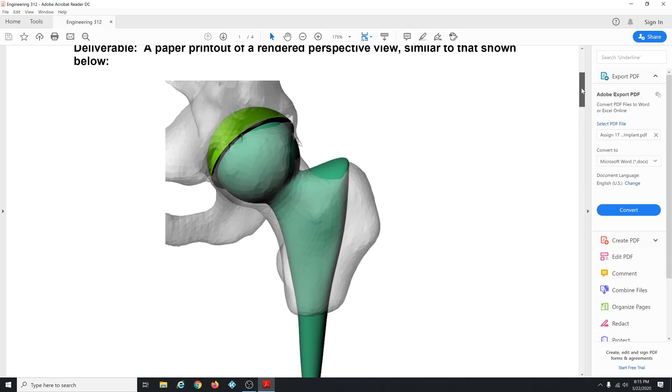I'll open that up. Here's the instructions. So turn in something like this when you're all done, but there's all the little steps in here that you got to follow, and I'm just going to go through these steps for you guys.

So I also have pelvis 3DM, which is a Rhino file I've already done some pre-processing on, so you need to download that. And then there's femur profiles DXF, and you need to download that as well. So I'll start up Rhino.

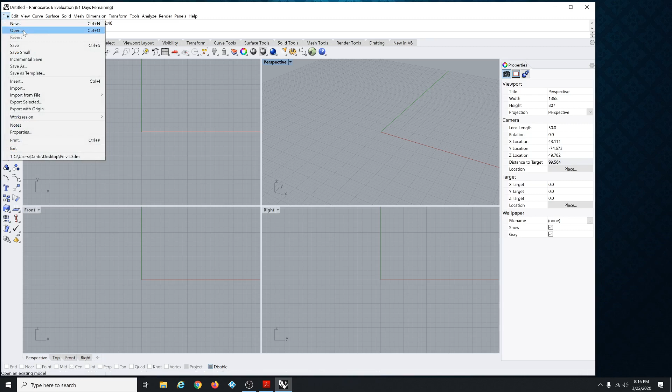I'm going to open, file open from the desktop, this pelvis 3DM, open that up. So I've done some pre-processing on this thing. This is a wireframe mesh, so they sometimes call it.

It's made of polygons, made of a bunch of little triangles. So there's so many of these triangles that it may be hard to see, so you might have to go to view, display options, ghosted, and uncheck this little show mesh wires thing.

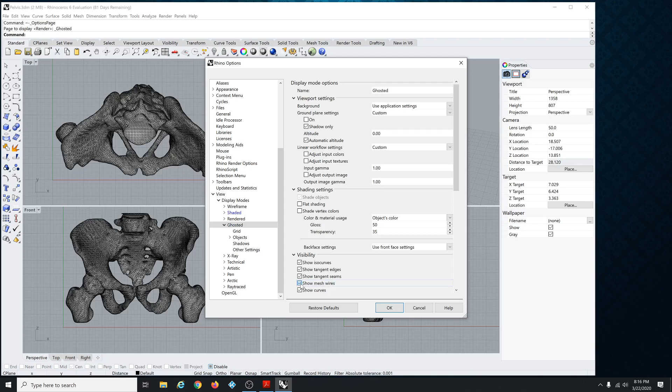Okay, so let's see. Yeah, do that. Then we'll just get started here.

So you want to draw a sphere, and I'll turn on grid snap and put this at the origin, and the radius is 0.8125. I'm just going to key that in.

Now you want to move this thing around using the top, front, and right view to do the actual movements, but watch what you're doing in the perspective. So do your movements in the 3 ortho planes, that is the top, the front, and the right plane, but watch what's happening in the perspective view up in here.

And let's see, so I'm going to turn off grid snap because I don't really want grid snap all the time for this thing. So it's hard to see, but you have to sort of eyeball where the ball joint is on the bone here, right? And then put our sphere in that same spot.

So that's pretty good. Now draw a cylinder and use O-snap, turn on O-snap, and make sure that all of these boxes are unchecked except for center. Now that means we'll snap to the center of this sphere here, and you got to be watching in all 3 planes to make sure that you have the center that you actually want. So that looks pretty good.

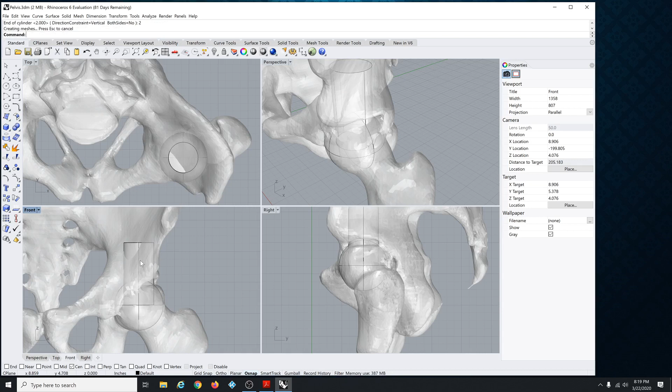All right, then you want to do a bunch of rotation. So type in rotate, click the cylinder, enter. It's asking for the center of rotation, which I want the center of the cylinder, which is also the center of the ball.

And it's going to want you to specify 2 points that specify an angle. So first one I'll just do there. It really doesn't matter where, but you want to do this kind of thing like this. I'm doing this in the front view, and turn it around so that it goes down kind of aligned with the bone here, the femur. Drop it there, and then repeat that rotation, the same object, that is,

the same center point, but use the top plane now. Okay, so I'm starting the rotation and then I'm specifying an angle out about that way. And I'm watching in the other views what's happening to see if it's going down the bone right.

That looks pretty good. Okay, I'm going to do another rotation. So I press enter, that'll repeat the previous command, which was a rotate. Select objects, that's the cylinder, enter. Center point, you can select the center in really any of these planes. But when it asks for the angle or first reference point, I want to do the first reference point and the second reference point that specify the angle.

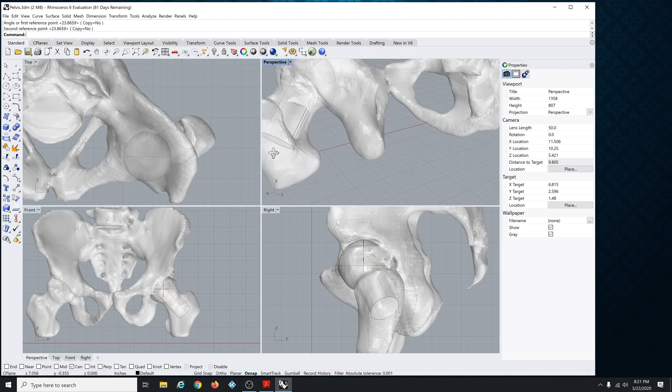And then you can go and look around in the perspective. It would be better, you can see the cylinder right kind of in here is kind of, it's not inside the bone, so I could probably do a couple more rotations.

So I'm going to hit enter to repeat the rotate command. Select the cylinder, enter, select the center point. Let's see what happens if I rotate it in the top view a little there. So I'm doing the rotation in the top view, but I'm watching mostly in the perspective this time.

That looks pretty good, but let me do another rotation.

Select the cylinder, enter the center point. Let's do it like maybe... I think I might be getting it now, maybe.

It's not bad. I don't like the way it's poking out through here. I think that's about as good as I can get it. I might be able to fix it up here.

Let me do another rotation in the front view and see if I can make that better. Yeah, that's getting a little better. Let's do that. It's maybe a little bit better. That's not bad, I'll go with that.

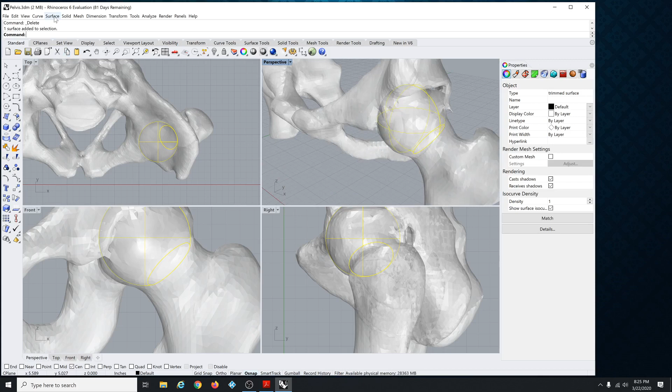So I'm going to offset this surface. So it's surface, offset surface. Distance is 0.125. That's already keyed in because I've done this before. And the arrows are pointing out away or outside to the outside of the ball. If you wanted to flip those arrow directions, you could press the flip button, the flip option up here. All right, that's what we want. So press enter. There we go.

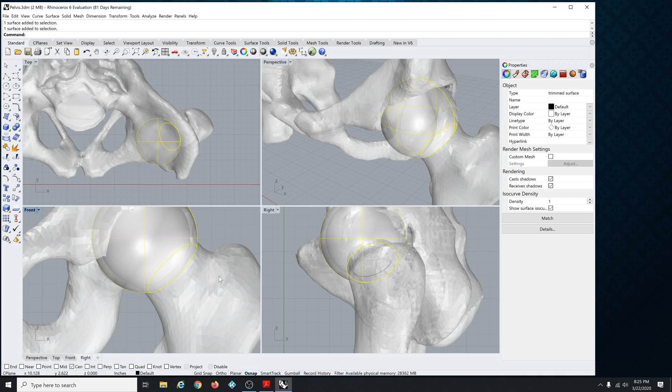So we've offset. We have two surfaces now. All right, now I want to take this outer surface and cut it so that it forms kind of a half sphere that would be the cup stuck into the pelvis.

So I want to draw a surface plane corner to corner, and I'll draw it in the front view. I'm going to click in the front view. I'm going to click here and here. So it's bigger. The plane is bigger than the sphere.

Okay, now if you look in the perspective view, you can see that the plane was drawn on the red line, or the plane that goes through the red line. See, it's sort of lined up with the red line here. In other words, it's right here on the red line in the top view.

So we want to move that plane to the center of the circle. So type in the move command, and with O-snap on and the center snap option, the only snap option, just center.

It's asking for the point to move from. Put your cursor on the plane until you get this center point, and be sure to look in all the planes to verify that you're getting the correct center.

So we're selecting the center of the plane, really. Now move your cursor over until it snaps to the center of the ball, and once again looking at all four views really to make sure that I'm snapping to the correct center.

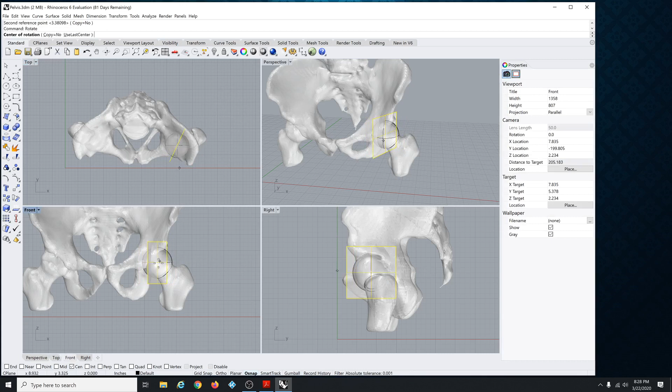There's my first reference point, and I'll turn it approximately so. Then I'll press enter to repeat the rotate command. It's asking me for the center rotation. I'm using Osnap to select the center of the circle. Now it's going to want two reference points that specify the angle, and I'll do those two reference points in the front view. So I'll click here and turn it about like so.

Okay, now I'm going to go over here to the perspective and just sort of look at it. And wow, I did it. That's a pretty good job. I lucked out there. I want this plane to be kind of tucked up against the pelvic bone, and it looks pretty good. Now, I lucked out there.

Now you might have to do several more rotations, and if you do them like a little bit in each view, a little at a time, then sort of check in the perspective until the plane feels like it's in a good spot.

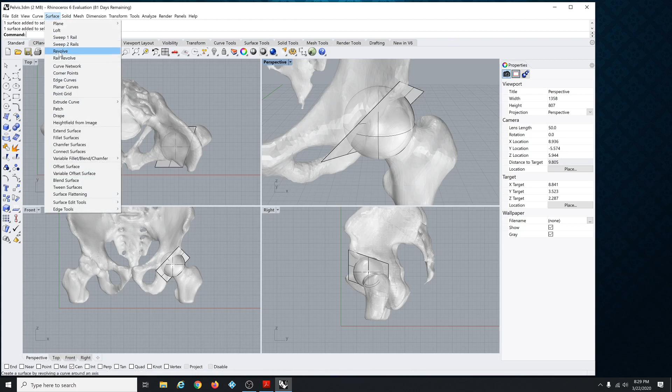That's pretty good. Now I want to use this plane to cut this outer sphere, and I want a little bit less than a half sphere, so I'm going to offset this plane using surface, offset surface, select the plane, enter, click this flip all because I want the offset to go towards the pelvis, and my mouse slipped.

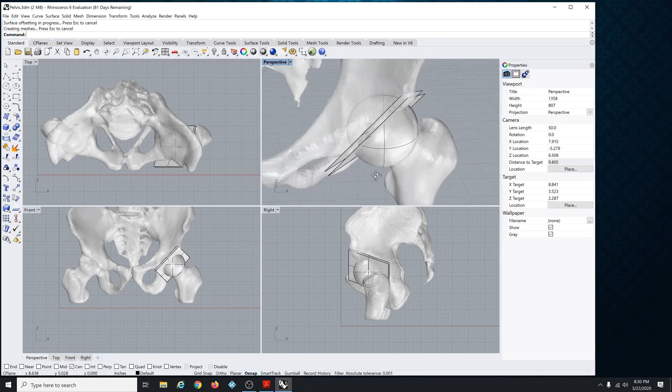I selected enter, I think, but you might have to hit enter. So there's the offset that I did. I just slipped and it did it. But anyway, there might be a missing enter that you have to do.

So play with that. All right, now I can take this first plane and delete it. I don't need it anymore, and I can go to edit, split, and I'm going to take this outer surface. That's the object I want to split. Press enter. Then it's prompted me to select cutting objects. I'll pick this plane here, press enter.

So it took this outer ball and cut it in half, and that's the half I don't want. So I'm going to delete that. I'm going to pick the plane and delete that, and that right there is the outside cup that's kind of tucked into the bone, and I want that.

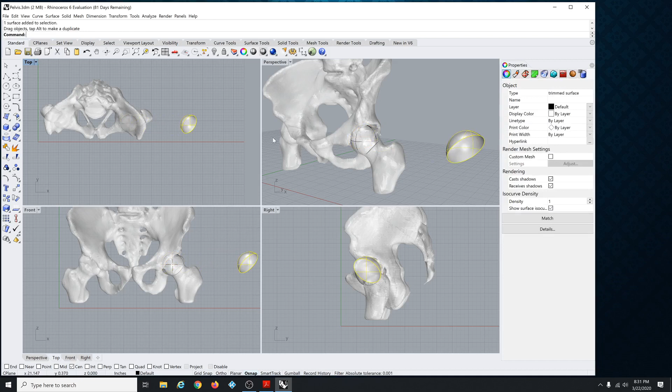Okay, it's just a surface. It's just a hemispherical surface, it has no volume. It's just the curvy surface. I need to cap the end of it. Let's see, just so you see what I'm talking about, you can just drag it over here and then look at it. You can see that it's just a surface. So I'll Control Z to move it back.

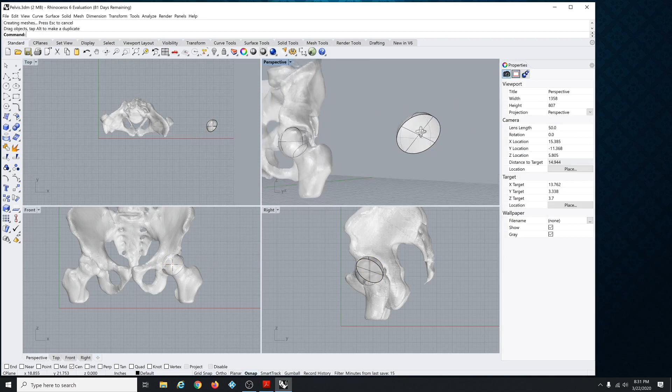All right, now I want to go solid, cap planar holes. Now it capped it. I'll move it out here so you can look at it again. So now it's a solid, and because it has a surface covering this opening, it has a flat surface on there.

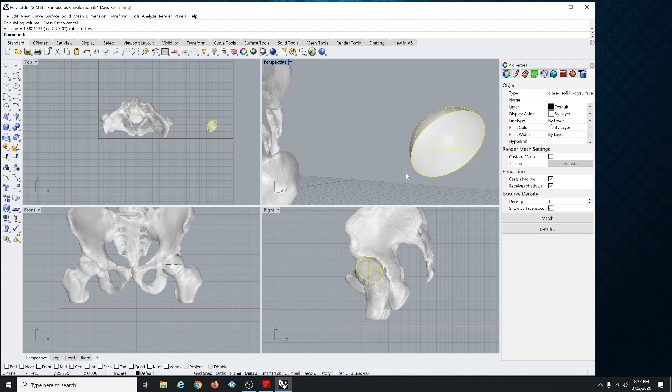And to double check, it's good to select it and do a volume command. And if you get a number, which I got 1.382, that means it's a fully enclosed volume, which is what Rhino considers to be a solid. All right, I'll Control Z to move it back. So that's the cut.

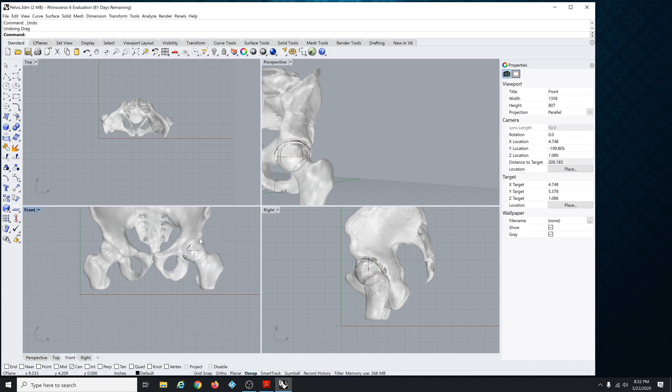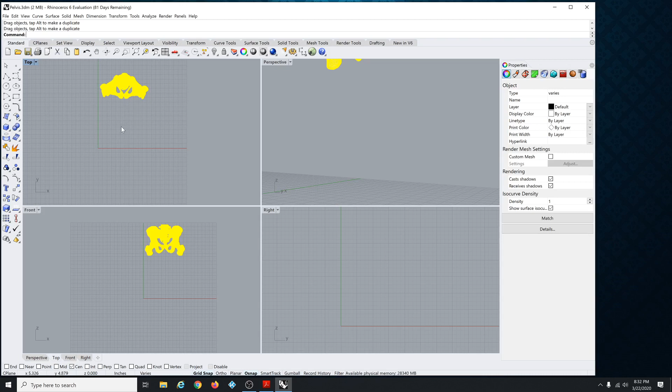Now let's go back to finish, to work on the rest of the hip implant. So I'm going to grab everything and move it. I'm going to use grid snap and just drag everything kind of straight up and up against center. I grabbed it in the front view and dragged it up, and then I grabbed it in the top view and dragged it back along the y-axis. I just got it out of the way so that I have some room to work in here.

All right, now go File, Import, select Femur Profiles DXF that you've previously downloaded from the website.

Select Open. Select OK to accept all the defaults. This is what you get. I'm going to select the border and delete it.

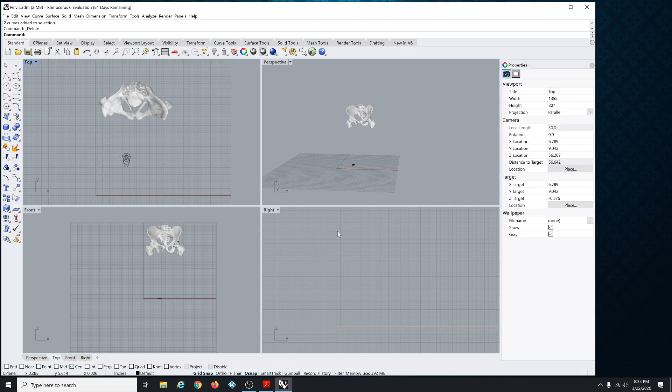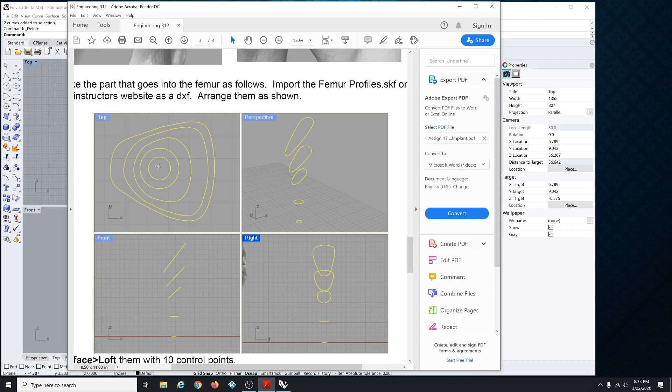Now if you look at the instructions, what you need to do is get your display to look like this. In the top view, see how these things sort of point to the left here. Here they point down, but in my instructions they point to the left. They're arranged in the front view using the grid. The first one is 1 inch up, then approximately 2 1/4, then approximately 3, then approximately 4, and they're rotated at these angles.

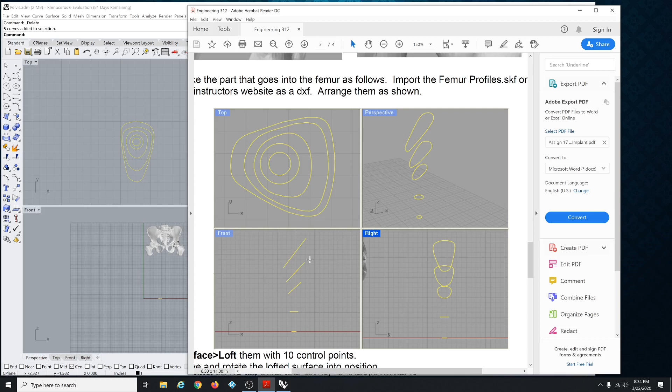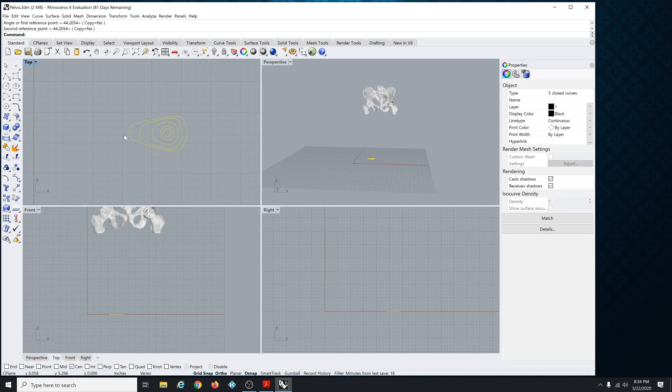So refer to these instructions as you do a series of rotations until your screen matches. I'm going to grab all of these, and first rotate the top view about the center. Turn on ortho so your two reference points specify the angle correctly. There's the first reference point, and the second would be straight down. So I'm just turning that 90 degrees so it points to the left in the top view.

Then select in the top view the outside one, drop down to the front view with your cursor, and drag it up 4 inches. Then go back to the top view, select the next one, drop down to the front view, and drag it up 3 inches.

Then take the third one from the top view, drop down to the front view, and drag it up 2 1/4. The drag-ups I'm doing by leaving grid snap on and just watching the grid as I do the drags. Then this circle here, select it in the top view, drag it up 1 inch.

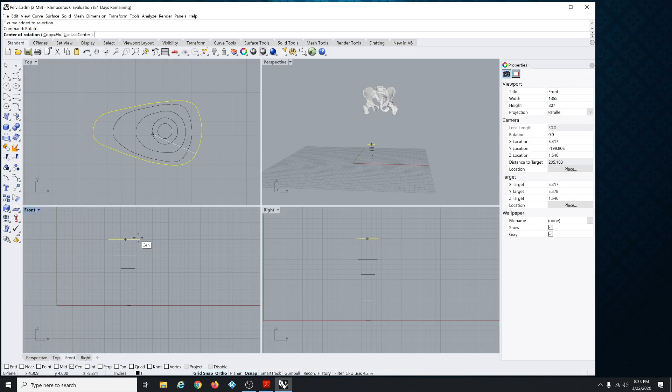Then take this one here and do a rotate. Snap into the center, that's fine, doesn't really matter. Turn off ortho and get it to look about like that, just eyeball it. Then the second one, do a rotate, get it to look about like that. That's too much - about like that. This one, do a rotate, get it to look about so.

Those are pretty good. Then maybe turn grid snap off and move these around so they look a little smoother. That's pretty good. Okay, now selecting all these in yellow, just to make them yellow so the group is all together, to point out that it looks like the instructions now.

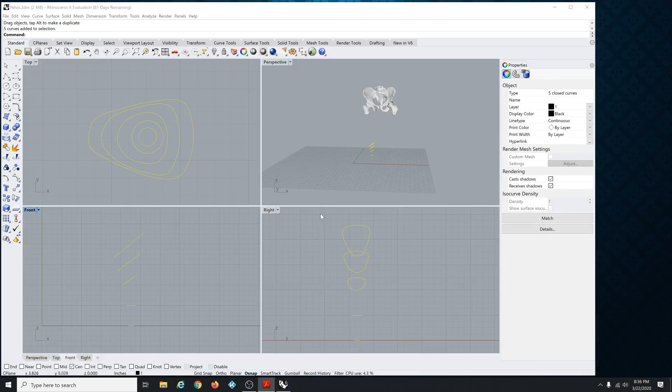So now I have all of these selected. You can do surface loft. It's going to draw this funny little line. You do need to take some time and fix this line up by dragging these. So you want to turn off OSnap.

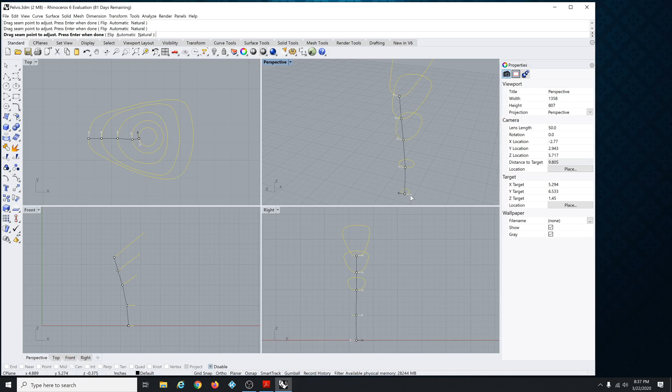You want to drag these little dots around so that they're straight. You have to click on them, then drag, then click again. Click on it, drag, click again. And then they have these little arrows. Click on the arrow until all of these arrows are pointing the same direction. So you want the line to be pretty straight and the arrows to all be going the same direction.

Then once you have all that, press enter. And this one turned out okay. Now, if yours doesn't look smooth like this, go back and adjust that line a little bit more. Get the line straighter and get the arrows pointing the right direction, and try again. You might have to do that a couple of times, tweaking the line, the little points on the line, so that they're centered and straight. Play with that a little bit.

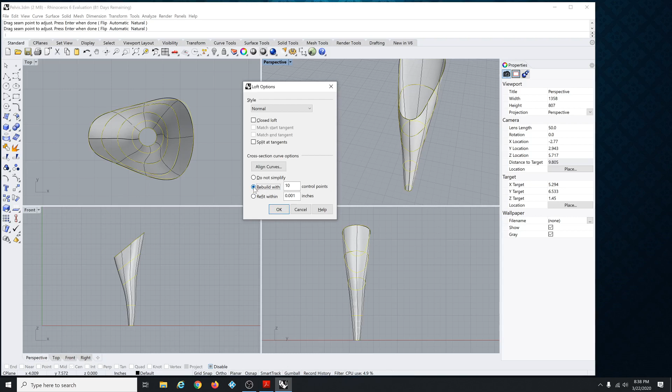Then click this rebuild option with 10 control points. Make sure the option is highlighted, then say okay, and that's it. That's the surface we need. So it's just a surface, hollow on the top and hollow on the bottom. We're going to join it with some other surfaces so that the only thing missing will be this hole in the bottom, and then we'll cap that using cap planar holes.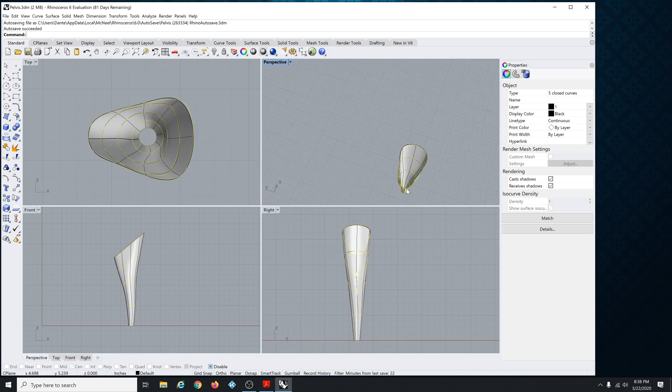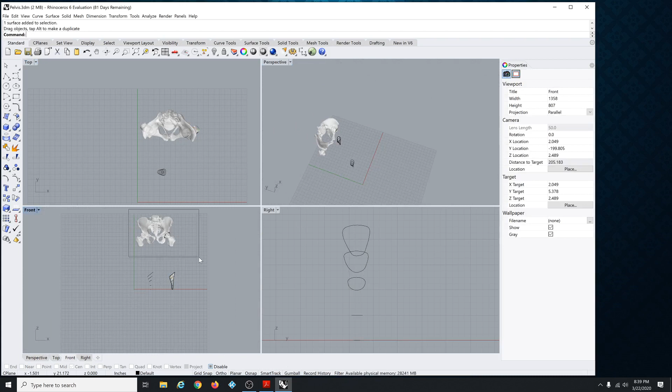So for now, we want to select the surface we just made and move it, moving it in the top plane inside the bones. Then I'm just going to grab all of these bones and move them down in the front view, and I'm going to move them down in the top view as well. And then I'll take my surface and move it down.

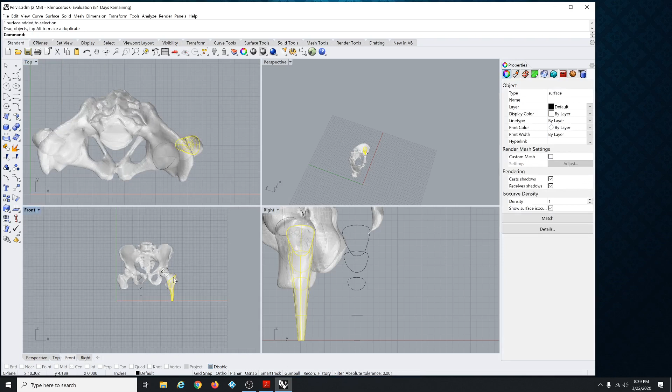Okay, so let's see, get this all set up.

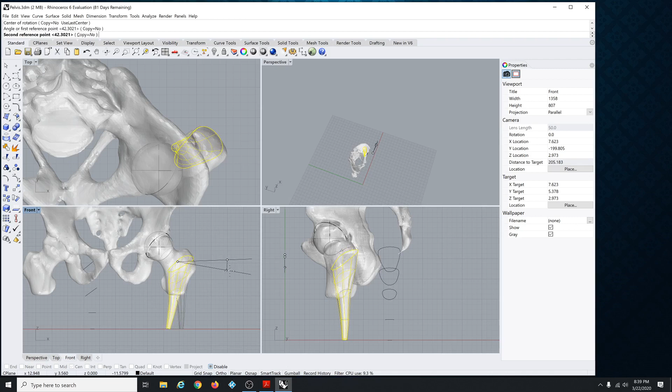So I need to do a rotate. Turn this guy about like so in the top view. Do another rotate. I have grid snap off, ortho off, everything off. I'm just eyeballing it. That's fine, it's biology.

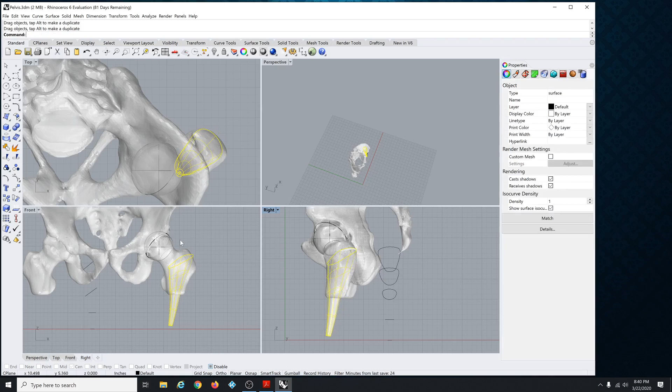Nothing's very precise here, nothing lines up on snap and bones. So I'm just moving it a little at a time in the right view, the front view, and the top view, doing some rotations until this surface here sort of points kind of down inside the bone. That looks pretty good. Just checking it in the perspective.

All right, so what I have is this surface that fits in the leg bone, and then I have this ball. I need to join those. We have a command called surface blend surface.

Select that. It's asking for an edge. I want to pick this edge right there. Okay, then it's asking for the second edge. I'll turn the view around. It wants this edge.

Okay, having a problem here. I think I'm going to start over. That's not good, let me start over.

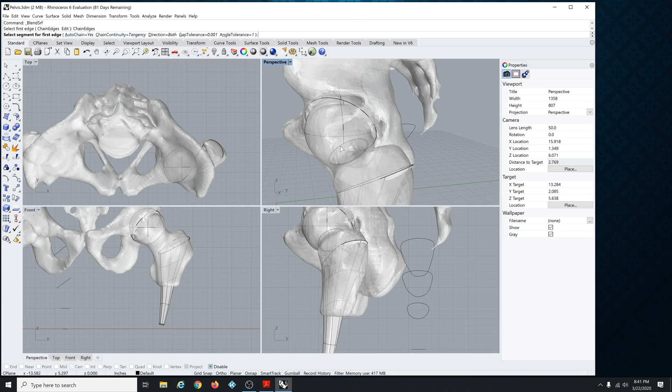So, starting the command over, surface blend surface. I'm going to click chain edges. Yeah, I want to make sure that auto chain equals yes, it does. All right, I'll pick this edge. And for some reason there's several pieces to this edge, and if you click auto chain, make sure that's yes, then it'll join all of those edges.

Okay, that's the first edge. The second edge is this one. All right, great. And it draws this line with the two dots, and that looks pretty good.

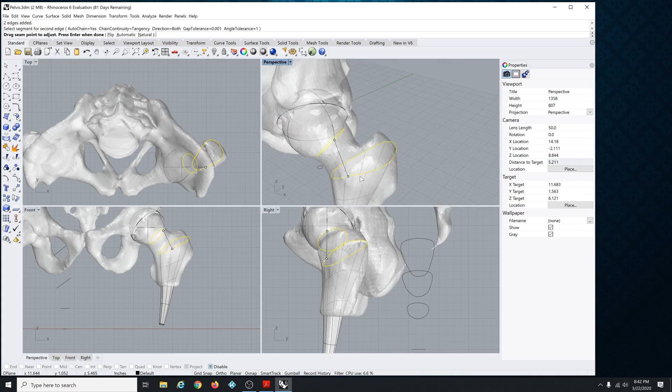You can edit that if you want by dragging this point around and playing with the arrows. I don't think I needed to do that, but you might need to. Anyway, that looks pretty good. Make sure it's straight and not all twisty, then press enter, all right great.

Then you get these little sliders. You can sort of adjust that until this thing looks like it would be strong or whatever. So I'm going to go right there, adjust those two sliders, and then say okay.

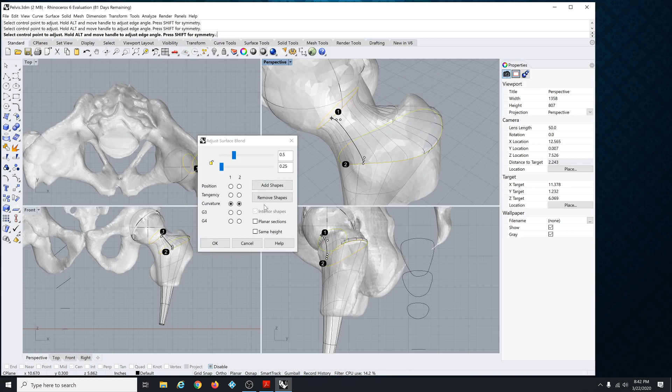Okay, great, so I have this surface, and this surface. I'm going to hold down shift and select all three. Then I'm going to go edit, join. All right, so these three surfaces are joined together.

They're still open on the bottom, it's not a volume yet. Like if you typed volume, it would fail because there's a hole in the bottom. So you've got to use the solid cap planar holes command, and it puts a little surface on this small hole on the bottom.

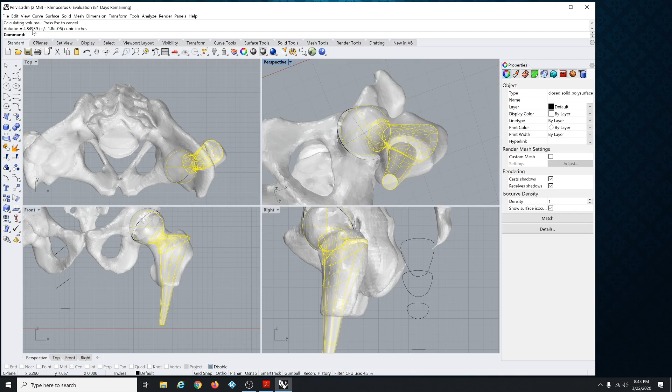And if we typed volume now, we get a number 4.85, which just means that these surfaces fully enclose a volume. Okay, now that this is a fully enclosed volume, and this cup is a fully enclosed volume, we can do a Boolean difference, right?

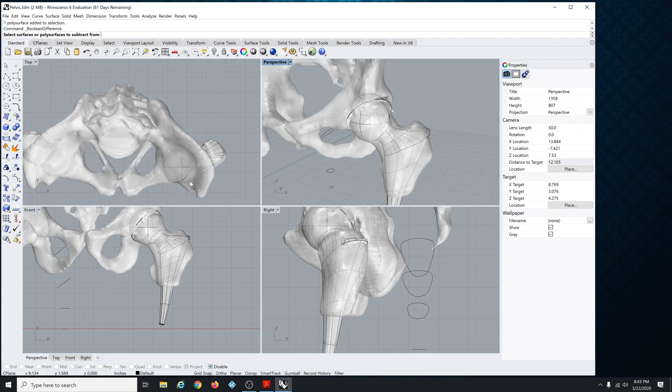So we can do solid difference. It says select surfaces to subtract from. I want to subtract from this cup. Press enter, and now it's asking to select surfaces to subtract with.

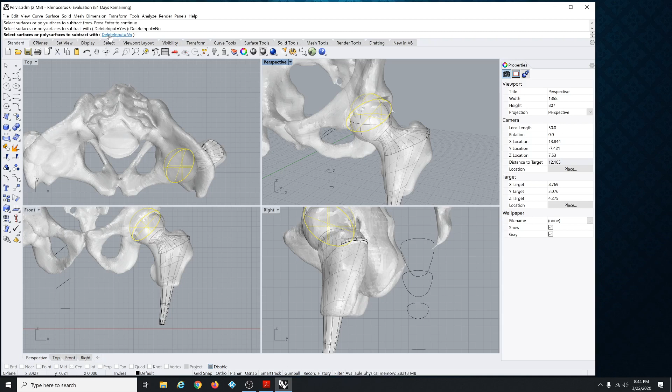I want to click delete input and say no, right? You want delete input equal to no, because I'm going to pick this thing and press enter. So basically it took this half sphere, or a little bit less than half a sphere, and it hollowed it out, and you can see that in the perspective view.

Maybe if I put it on artistic, except artistic takes forever with these wireframes, so shaded maybe. Okay, so this is a cup.

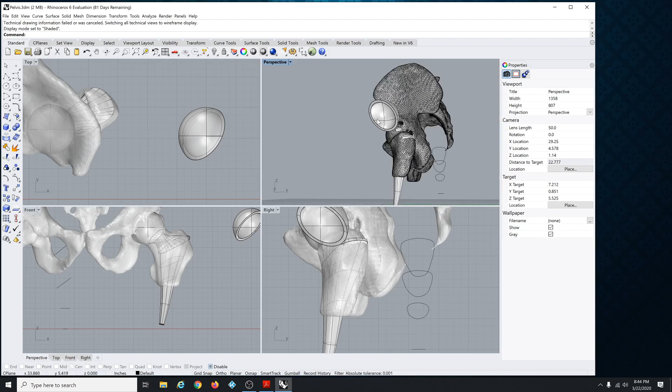Okay, I'll Control Z to put it back, and that's it basically. So pick this thing and drag them over here. Maybe pick this thing and separate it a little bit. Then go to the perspective view.

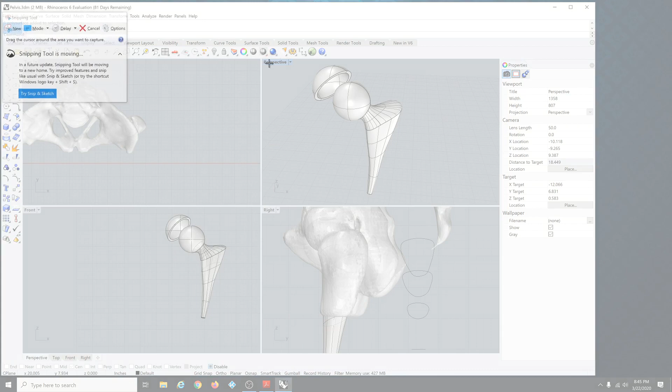Play around with the camera here, get a view that looks about like that. Okay, do the window snipping tool, new, draw window. Okay, take this thing right here, paste it into Word. That's the assignment, all right.